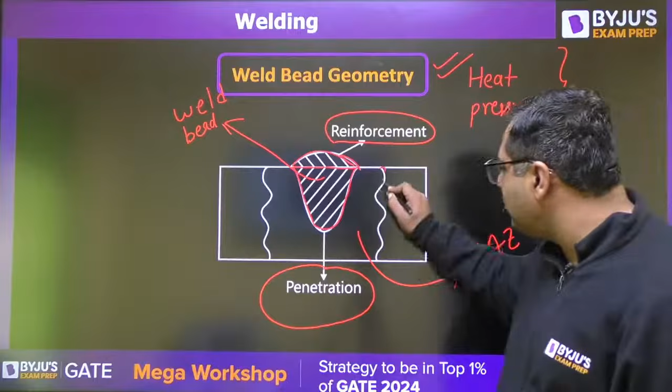After that, the part which is not going to be affected by the heat of welding is said to be the unaffected zone. And if I make a tangent onto the reinforcement part, like this, then this angle is said to be the angle of convexity. It somewhere gives the idea about reinforcement, how much it is.

So guys, this is the weld geometry I have just defined. Very good, Amir. So I would ask you, we have discussed here three portions: heat affected zone, unaffected zone, and weld bead. If I ask you out of these three which is having more strength and which is having the least strength, that kind of discussion I have done many times in the classes on YouTube. So I would like to ask you, out of these three, which do you feel is going to have more strength and which do you feel will have less strength?

Yes, please answer, all of you. Very good guys. So as per your answer, you know weld bead is having the highest strength, and heat affected zone would be having the lowest strength. I would also give you the reason for that. Very good, Deepak Yadav, Shyam Sundar, very good, Naveen, Surendra Singh Solanki, very good.

So guys, out of these three I can say one thing: weld bead is having the highest strength, and heat affected zone is having the lowest strength. And the unaffected zone is going to be intermediate strength. Now you would be interested to know why it is happening.

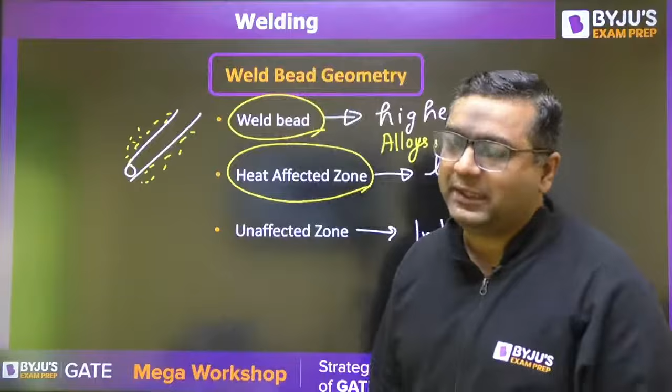But you know, whenever you are taking medicine, it is for the betterment of our body. But if you overdose on it, it is going to affect badly. So my dear, when you take medicine, it is always to be taken as per the prescription.

So when heat treatment is done, we know up to which temperature we have to heat it, up to which temperature we need to hold it, and what should be the cooling rate. If all these things are not controlled, it is said to be uncontrolled heat treatment, and uncontrolled heat treatment is not going to give the better result. It is not actually improving the property.

Because of that, in the heat affected zone, we are not intentionally heating it. Heat is going on because of welding, so whatever temperature is rising is not in our control. We don't know up to which temperature it is going to heat, for how much time, and what would be the cooling rate. So everything is out of our control in that zone, which is why uncontrolled heat treatment happens. And when things are uncontrolled, the properties are going to be on the poor side. That is why the heat affected zone is said to be the weakest part.

Very good, Deepak. So my dear, when we talk about the unaffected zone, there is no effect of heat and no alloy content, so it has intermediate strength. So I will say weld bead has the highest strength, then we have the unaffected zone, and then we have the heat affected zone.

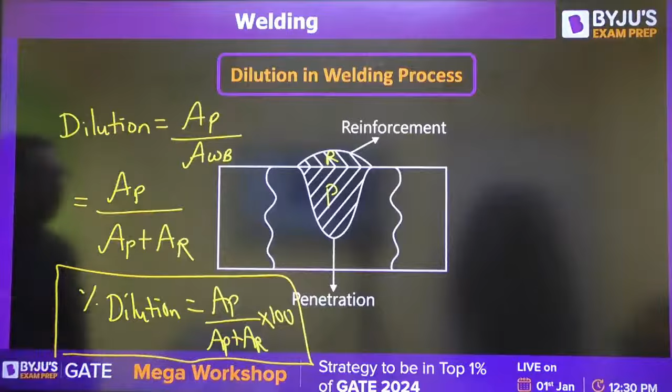And sometimes we are going to define percentage dilution as well. It is defined as AP by AP plus AR into 100. I also want to tell you that from this dilution type of term, you may also get a numerical, a new type of numerical, so be ready for that.

Very good, Umar. Very good, Shubham. Very good, Deepak. So guys, now we are going to start the first type of welding, that is shielded metal arc welding process. So my dear, it is a type of arc welding.

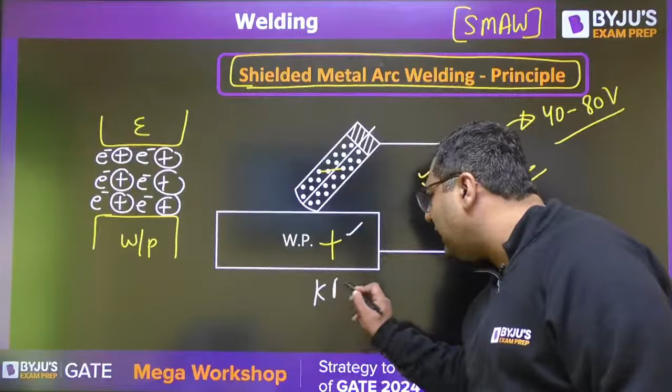So because of that, what is going to happen? The workpiece would be absorbing the kinetic energy of the electrons and the electrode would be absorbing the kinetic energy of the ions. It has been seen that the kinetic energy of electrons divided by the kinetic energy of ions is found to be in the ratio such that this is 2/3 part and this is 1/3 part. So if total 100 joules is there, 67 joules will go to the workpiece and 33 joules would go to the electrode.

You already know the workpiece has thick plates, so it needs more heat if you want to melt it properly. That is why, when you are providing this negative electrode setup—I am not saying the electrode is always negative, this is just for this case—the workpiece would be getting the kinetic energy of electrons, and the electrode would be getting the kinetic energy of ions, and by getting that kinetic energy, it converts into heat.

Because of that, first the electrode wire is going to melt, because this electrode wire has the lowest melting point. When it starts melting, by taking the heat, the flux will also start melting. So the flux has a melting point temperature above that of the electrode wire. The electrode wire and parent metal are of the same material, so the wire is of the same material, but the flux is a different material.

The flux is a different material because it is going to provide the alloy content. Second, it should have a high melting point temperature. Why? Because if the electrode wire is going to melt first, the melting happens in such a way that the electrode wire melts before the flux, and because of that, you get this type of shape, with the advantage that the flame, arc, or spark gets concentrated towards the workpiece. But if by chance the flux melts first, then you will get this other type of diagram.

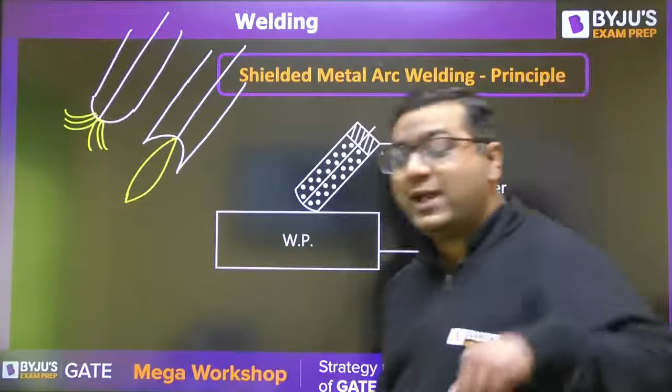So we have discussed two functions of this flux. The first function is providing the alloy content, because of which the weld bead becomes strongest, and that is why welded joints are said to be stronger than the parent metal. The second function is, since it melts last, you get the convergent flame, arc or spark.

So when this happens, the mixture of electrode wire and flux mixes up and goes inside the groove, and you get the weld produced. You will have this weld pool - when it is in liquid form we call it pool, after solidification we call it weld bead. It has the combination of flux as well as the molten wire material.

So now what happens? Flux material has a high melting point temperature, and also has one more property - it is lighter than the pure metal. So as flux is lighter than the pure metal, when you have this molten weld pool, the flux material will go up because it has lighter weight. Because of that, flux will go to the top and try to make a layer upward.

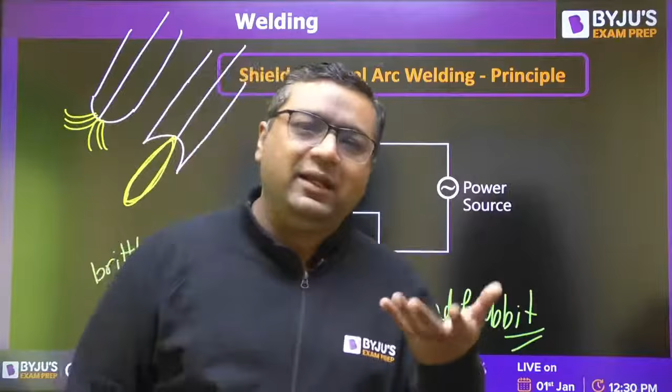When they make metal oxides, these are generally found to be brittle because they are of ceramic nature. So if they are brittle in nature, your entire weld will become brittle. Like, whenever you have a glass - glass is a brittle material - and by mistake when you were holding it, it fell down, it will break into parts.

So likewise, if weld is brittle, it will also break fast. But we don't want that property - we want it to be ductile in nature. That is why we want oxide not to form. So this is the third function of the flux coating: it avoids air oxidation of metal, it gives us alloy content, and it also gives direction to the flame, arc or spark.

So the entire setup is going to be like this. I would also like to tell you, in this zone, this is the zone where arc is produced. There electrons and ions were moving - electrons going towards the workpiece, ions going towards the electrode. During that motion, there was a collision between electrons and ions, and because of that collision, we get a very high temperature of around 6,000 to 12,000 degrees Celsius in the arc gap.

In this arc gap, some ultraviolet rays are also produced, and these rays are harmful for our eyes. That is why it is always advised, whenever you are doing arc welding, to wear some glasses for protection. This is the type of glasses you have seen in the labs also, which were provided so we could do welding safely, because otherwise our eyes may be affected.

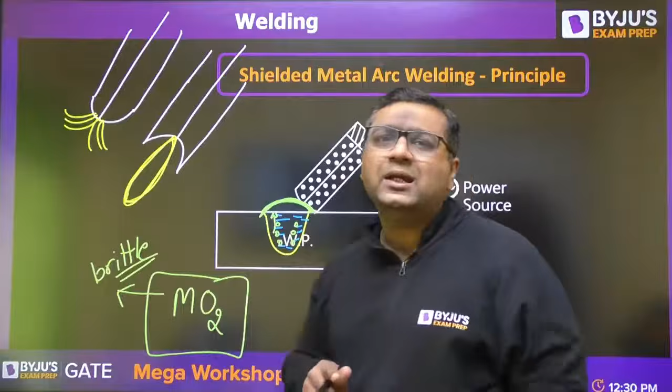Now the point is, sometimes when these flux particles are moving up, that flux particle can make a layer only if it is able to go up within time, because at the same time solidification will also start. So solidification of this molten weld pool shall happen only once the flux particle goes up and makes the layer. Otherwise, the flux particle will remain inside.

If flux particles remain inside, then after solidification we call them slag. Slag is meant to avoid air oxidation. But if that slag solidifies in between the weld pool, it will make a defect. That defect is called slag inclusion.

So why does this defect happen? Because if that flux particle is unable to move up before solidification, which depends on the temperature of the weld pool and depends upon the current settings, if proper current is not provided, then definitely it is going to happen.

You know heat generation is given by I square R T, so heat generation is directly proportional to I square. If current setting is not proper, heat generation will not be proper. In that case you may not have good temperature of the weld pool, because of which slag inclusion kind of defect can appear. So we need to avoid this slag inclusion.

For that we need to work on the current setting. When we talk about the current setting, it would definitely be a part of the transformer. So when we talk about transformers, many types of transformers are available.

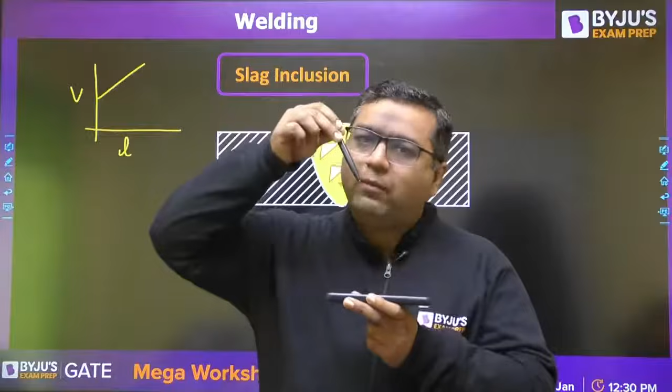So as I said, let us say we have this workpiece and this electrode, and if the gap is more, more voltage is required. If the gap is less, less voltage is required. So we have seen that it is going to be a straight line, V equals A plus BL. This is the equation between voltage and arc length.

So I said, if you are doing this welding manually, you can see this is the workpiece, this is the electrode. As the gap changes, the voltage requirement will change. And if the voltage requirement changes, because of that change, obviously the current setting will also change.

If current setting is going to change, the heat generation will change. Because of that, the temperature will also change. So because of this, the chances of slag inclusion are there.

So what we have seen, there are two types of movement between electrode and workpiece. One is movement of electrode towards the workpiece, other is movement of electrode along the workpiece. When we have two types of movement, this movement of electrode towards the workpiece is very important, because based on that we are going to have the defect like slag inclusion.

So that is why if both the movements are done manually, it is said to be manual metal arc welding process. If we are going to perform the critical movement with machine and non-critical movement manually, we call it semi-automatic type of welding. And if we perform both the motions with the help of machine, it is said to be automatic welding.

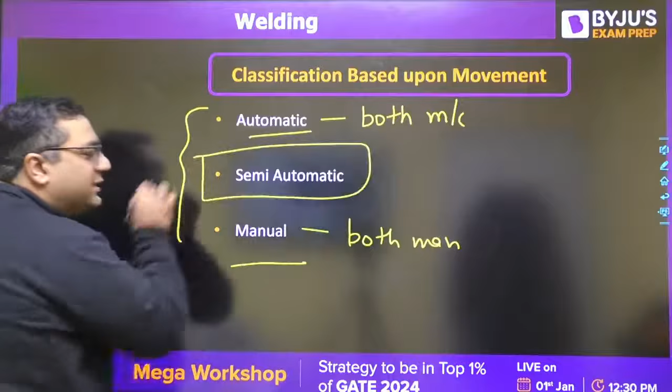If both are going to be done manually, then it is manual metal arc welding, and the best solution is semi-automatic, where critical movement would be done with the machine, non-critical movement will be done manually.

So now if we are going to perform manual metal arc welding process, in case of manual, it is damn sure that arc length will change. Because of arc length, voltage requirement will change, and because of this, current is going to change. So we wanted some temporary solution also for that, because under some situation we may not be able to always go for the automatic types of welding.

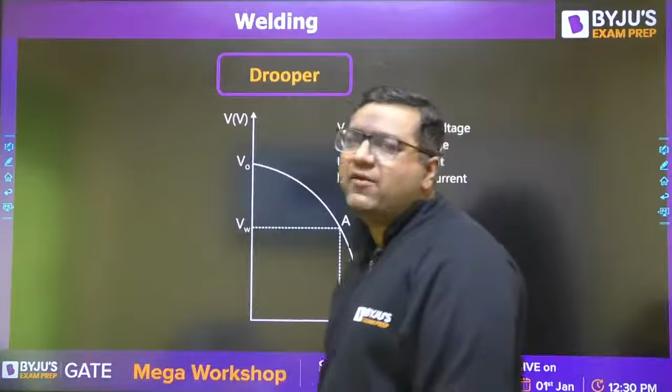So if that kind of thing happens, we can use it with the manual metal arc welding process and the chances of slag inclusion would be reduced. But if we are going to have semi-automatic type of welding, for that case we need not go for Drooper. For that case, we are using this type of voltage arc length characteristic, where previous one is said to be constant current transformer, and similarly this one is said to be constant voltage transformer.

But if I am going to show some linear voltage-current characteristic, there I can make the equation of this type of transformer. Like you have seen, it was linear. So if I plot it like this, then this voltage is said to be open circuit voltage and this current is said to be short circuit current.

So I already told you, if we have a circuit like this, and we are going to have - this is going to be the battery, let us say - we are going to have a battery like this.

We are going to show this. When we have this circuit, it is said to be open because there is nothing in between. So in this circuit, whatever voltage you have across these two terminals is called open circuit voltage, or EMF, electromotive force.

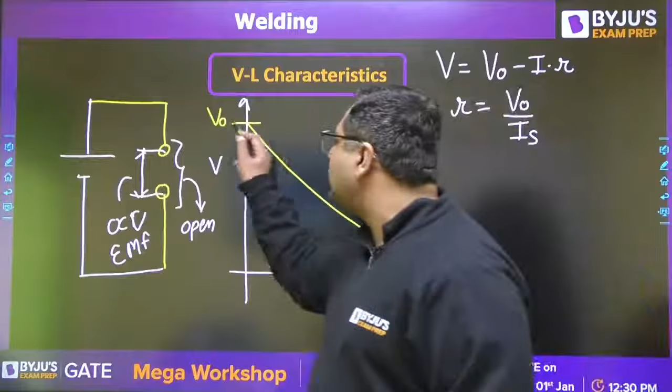But from this straight line, if you want to write the equation, you know we can write x by a plus y by b equals 1. So you can write x as I, so I by Is plus V by V naught equals 1.

Whether you use this or that, you will get a wonderful equation of the transformer, given as V equals V naught minus I times r, which we write as V naught minus V naught by Is into I. So we can also write it as open circuit voltage minus open circuit voltage by short circuit current, into I.

This is the equation of the transformer, and a lot of numericals come from this. As this session is related to the marathon, I am going to take majorly theory here only.

So I have given you this equation, and soon we will have a practice session where we will solve some problems on this. Now, there were some problems with the manual metal arc welding process, because of which we are moving to the second type of arc welding, that is submerged arc welding.

In manual metal arc welding, the first issue occurring was the problem with motion. Yes, if we used a drooper the problem was resolved, but that was still a temporary solution. So to make this motion perfect, we are going to include a machine for that.

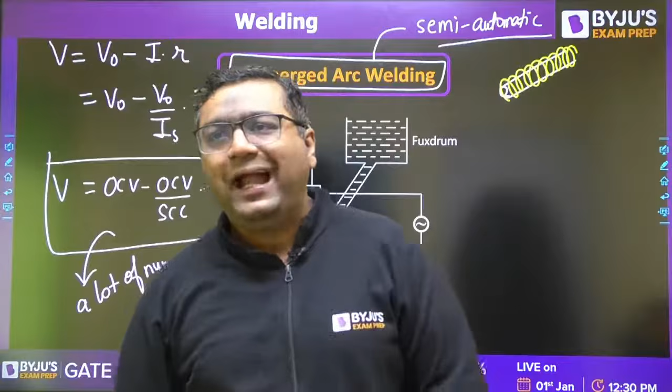So once one electrode wire is going to melt out, you need to change the electrode. And to change the electrode, you need to stop the welding process, which makes it a discontinuous process. So if we want to join two plates, after some time when one electrode is finished, we get a joint, then the next electrode finishes, we get another joint.

In that kind of process, we will have a number of joints present in the welding. If joints are present, there are chances of leakage. So if we are welding an LPG cylinder or a ship, that kind of joint could lead to leakage, and in LPG cylinder or shipbuilding applications we may get accidents. To avoid that, we needed a continuous welding process.

So this process is going to be a continuous welding process. To make it continuous, we have replaced the electrode with electrode wire, which moves continuously because it is present in the wire spool. So continuously the electrode wire keeps coming, and for that continuous input, we are also providing a servo mechanism.

In this servo mechanism, two rollers send the electrode wire at a constant rate. Because of this constant rate, the problem of gap movement is resolved, and you would not have a slag inclusion type of defect.

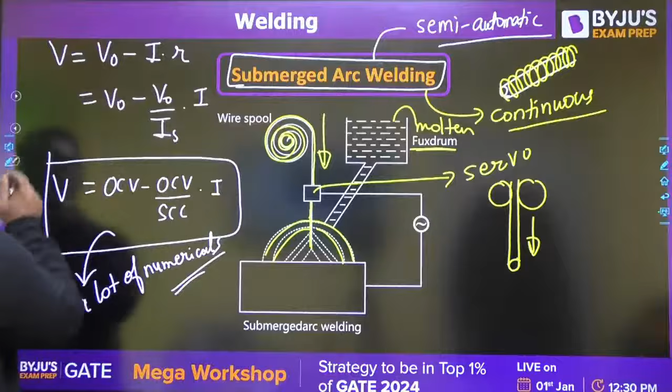It avoids air oxidation because air does not come in contact, and this flame or spark is concentrated because once again the convex type of shape is there. So all the functions are performed in the same way.

This process can be used for two wonderful applications: LPG cylinders, and after that, shipbuilding.

This is a continuous process. It can be used for mass production, and high speed of welding is possible here. Whenever welding is at high speed, the chances of heat affected zone are lesser, so the heat affected zone is smaller for such case.

Yes, please tell me guys. Teju, Amir, Shili, Shreyas, Sri Arvind and other students, please tell me up to this everybody got it or not. So I have revised this.

These are the applications. In short form, submerged arc welding is also said to be SAW.

Ramesh Mon, hi dear, how are you? Sir, shipbuilding, yes Amir, that is correct, I will be telling you.

But if you are not having the option of electro-slag or electro-gas welding, for such case you can tick submerged arc welding also. Otherwise, submerged arc welding is preferred for LPG, and for shipbuilding we are preferring electro-slag. But if electro-slag is not an option, we can go for submerged arc welding.

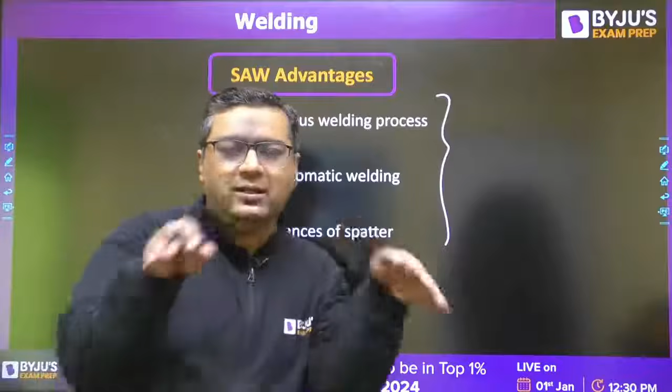The molten flux means chances of spatter are less, because the electrode wire is continuously within the environment of molten flux. So there is no contact of air, and this flame or arc cannot be deviated.

If it would be deviated, it can also create some kind of molten droplets on the metal surface, which is scattering of molten metal. This is not happening here because there is no contact of air with the flame or spark. So there are less chances of spatter.

Spatter is a defect known as scattering of molten metal, which has less tendency here. So the defect of spatter will not be there, and the defect of slag inclusion will also not be there.

Now we are moving to the third type of welding process, that is TIG, MIG arc welding process. TIG is said to be tungsten inert gas arc welding, and MIG is metal inert gas arc welding.

Generally students get confused over this because the name is tungsten inert gas, they are not using the word arc. They feel it is tungsten inert gas welding, so it is not a gas welding technique, it is an arc welding technique. So the name is TIG arc welding or MIG arc welding.

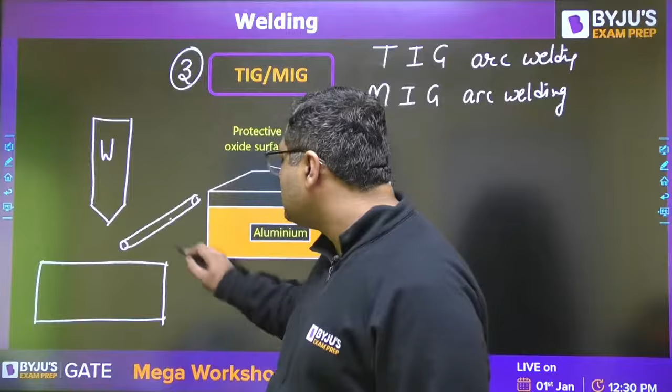So for that purpose, we are going to use some filler rod in this type of process. That filler rod is made up of the same material as that of the parent metal, so they have the same material. We will be using this consumable rod separately.

So what is the purpose of using such a thing? Why are we using tungsten? Tungsten is a very hard and brittle material. That is why if by chance its droplet comes inside the weld pool, it will make the entire weld brittle. So we never want that kind of thing. The first thing is very clear from here.

Second thing is, when we are using this tungsten, what is the reason behind that? Till now we were using the polarity where the workpiece was going to be positive and electrode was going to be negative. This type of polarity is said to be the straight polarity.

But when we are going to have aluminium type of material, it is very difficult to weld. So the weldability for aluminium is very poor. Why is it so? You already know metals cannot control themselves when they see oxygen in the heated state. But aluminium is so reactive that even at room temperature it reacts with oxygen and makes a layer of aluminium oxide, Al2O3. This Al2O3 is a kind of ceramic material which is very hard and brittle. We cannot weld it, so for welding of aluminium, we need to remove this layer.

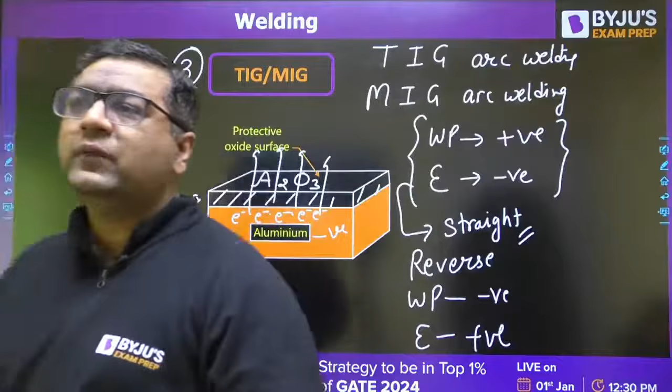Do we get alloy composition in the weld? If you want alloy composition, you would be providing separate powder for that purpose. But actually TIG welding is generally done for aluminium on very thin plates of 5 to 8 mm, so for that we need not do all this kind of thing.

So when these electrons go out and peel off this layer, that process is said to be cathodic cleaning, as Manas has written. You might be asking, sir, what is cathodic cleaning? Cathodic cleaning means we make the workpiece cathode, meaning negative, and then we clean it. That cleaning is happening because of this cathode, so that is why the name is cathodic cleaning.

But now the problem is you are making the electrode positive, so the melting temperature of the electrode should be very high. We use tungsten or tungsten carbide, because their melting point temperature is more than 3500 for such cases. No doubt, if by chance even a single droplet of tungsten goes into the pool, the weld will be very poor, so we need to avoid that. So we never make this type of electrode.

In reality, when we make the tungsten electrode, we make it of this shape. Meaning if the diameter of this tungsten electrode is D, we keep the diameter of the surface to be 1.2 to 1.5 times, meaning 20 to 50% more diameter we are going to keep. When we do this, the heat required to melt the tungsten electrode would be more, so the chances of melting get reduced. This thing is said to be electrode preparation.

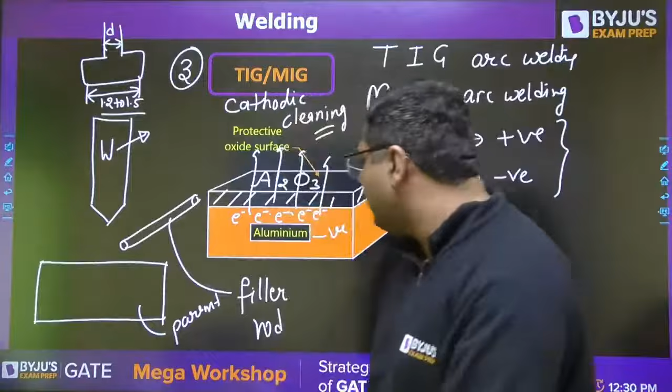Whenever you are doing welding here, we can weld very thin plates of aluminium because the workpiece gets less heat, since the negative terminal gets 1/3 part of the heat and the positive terminal gets 2/3 part of the heat. So that is a kind of limitation for this process also. When we use this TIG process, we get to know about the term weldability. If we talk about the weldability of steel, I would like to say that weldability is inversely proportional to the carbon content. If carbon content is more, weldability will be poor.

So that is why whenever we are going to have low carbon steel, medium carbon steel and high carbon steel, weldability is going to be poor for high carbon steel, and highest for low carbon steel. Weldability is inversely proportional to the percentage of carbon content.

Now the point is, here you are not using the flux. Who will solve the purpose of flux? We are not providing molten flux here. We are providing inert gas, and this inert gas will solve the purpose of flux.

When inert gas is provided, it also helps us make a concentrated flame, because we provide the inert gas from all sides. It will also avoid contact with air, and since inert gas is non-reactive, there would be no reaction between the surface and the inert gas. That is one more advantage.

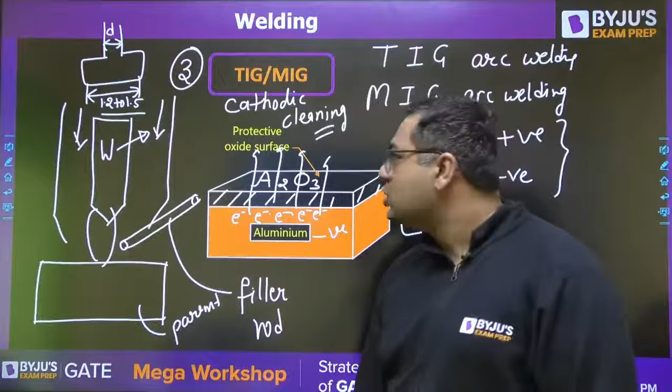So as inert gases, you can use helium, neon, or argon. Generally we use argon from an availability point of view.

So we have studied the TIG process. Here there are some problems. One is you are using a tungsten electrode which is non-consumable, but there are still chances of consumption if temperature increases beyond a range.

Second problem is, since we are using this non-consumable electrode, a filler rod is required, and the filler rod has a constant size. Once the filler rod is used up you need to stop the welding. Also, because of reverse polarity, you cannot weld thick plates.

So for that purpose, an improvement came in the form of the MIG process. In the MIG process we have replaced the tungsten electrode with a metal electrode which is consumable, so a filler rod is not required. Here we were once again providing the servo mechanism.

So there will be a continuous flow of electrode. Once again you are using inert gas for the purpose of flux. That is why the name is Metal Inert Gas arc welding.

Now, this is inert gas in general, and inert gas is going to be very costly. If you replace this inert gas with CO2, which can be done with metal inert gas welding, then since CO2 is not an inert gas, the name of the process becomes Metal Active Gas Arc Welding process.

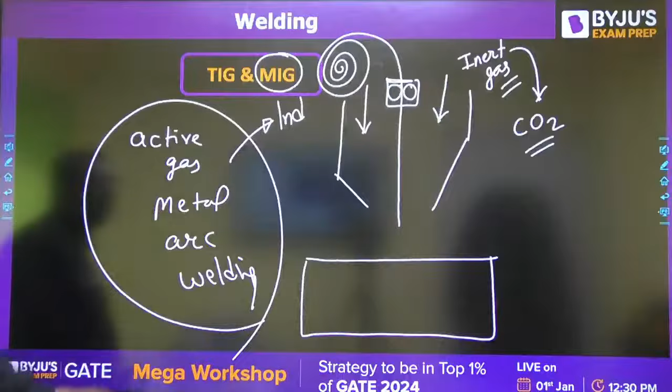This is the process nowadays used in industries. It is similar to submerged arc welding. So this process is active gas metal arc welding, and it is used in industry. It has replaced the TIG process. I feel everybody is getting this. This is said to be the MIG process.

Now I am going to tell you something more about numericals. There are three types of heat. One is heat generated, which is given as I squared RT. Second is heat supplied. Third one is heat required.

Let us say we need some 700 joules of heat for welding or melting purpose. For that, we may be providing some 1400 joules. Why are we providing more? Because during welding, the entire setup is exposed to atmosphere, so there would be some losses of heat to the atmosphere. So if requirement is 700, you are supplying 1400. This gap of 700 is the heat loss to the surroundings.

Whenever we are going to have this heat supply, we need to generate the heat. Heat generation takes place by this formula, and let us say we are going to generate 2000 joules of heat. Why is heat generation more than supply? Because heat is generated at the tip of the electrode, then that heat is distributed, and some heat loss to surroundings happens there too. So there would be a heat loss of 2000 minus 1400, which is 600 joules, and that is heat loss 1. This other one is heat loss 2. So this total is the heat loss to the surroundings. Heat generation is 2000, requirement was 700.

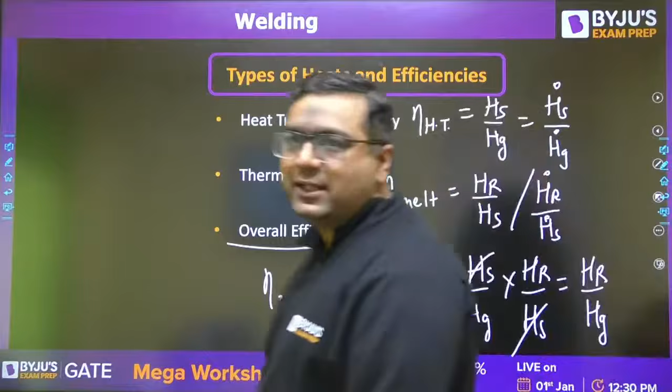Guys, you may be thinking I am going very fast, but as I already said, this is the revision marathon. So when you are reading your notes, it should feel like in the movies, when letters were exchanged, and you could hear the actor speaking from the letter. This marathon is of that type only, like your notes are speaking.

Their process is welding. So generally process efficiency will be said to be this melting efficiency only. But in general they mention it using the terminology we have discussed here. I feel you got it.

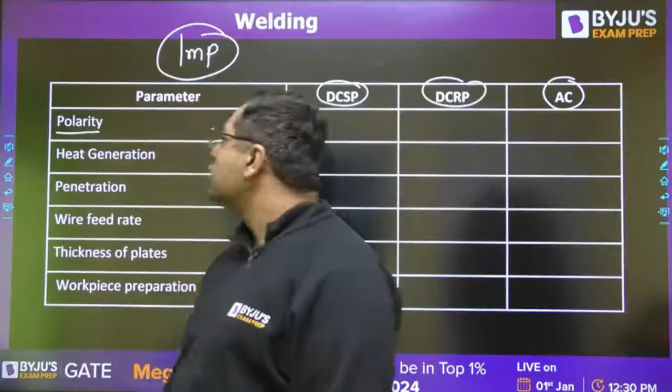Now we are talking about polarity. In direct current straight polarity, workpiece is positive, electrode is negative. In direct current reverse polarity, workpiece is negative, electrode is positive. In alternating current, workpiece is positive and negative alternately, electrode is negative and positive alternately. For heat generation: in straight polarity, workpiece gets 67%, electrode gets 33%. In reverse polarity, workpiece gets 33%, electrode gets 67%. In AC, both workpiece and electrode get 50-50%.

Then penetration: here workpiece is getting more heat, so we get deep penetration. Here we get shallow penetration. Here we get intermediate penetration. Wire feed rate means the rate at which the electrode wire is melting. That would be less here because less heat on electrode, more here because more heat on electrode, and intermediate here because it's 50-50 heat.

Thickness of plate you can weld: in straight polarity you can weld thick plates because workpiece gets more heat. Here, thin plates, because workpiece gets less heat. Here, intermediate, because both get 50-50.

Now workpiece preparation. We have already seen electrode preparation. If my workpiece size is less than 5mm, we directly weld them. For more than 5mm, we provide some kind of preparation for more molten metal to come inside. This is called workpiece preparation, done when plates are of more thickness. So workpiece preparation is done in DCSP, not done in DCRP. In AC, it depends on thickness - generally if thickness is more than 6 to 8mm, only then we go for this workpiece preparation. Different books show different values for that.

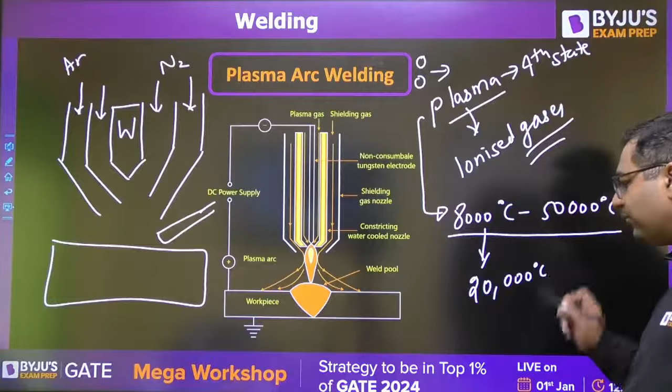You may be thinking, sir, at that temperature the plates will get melted out. So I am not saying that temperature will be there with the plates. That temperature would be there with the gases. Whenever these plasma gases react with the arc, because you provide some power supply here, these plasma gases convert into ionized gases, which get a very, very high temperature.

Like whenever you are sitting in front of fire, that fire definitely has some very high temperature. But when the air taking the heat from that fire comes to us, that heat will not create that same temperature for our body. Why? Because our area is more, so when that heat gets distributed, our temperature will not reach that much.

That is going to happen when those plasma gases come to this workpiece. Deep penetration will be there, and that is why when this kind of welding takes place, we call it the keyhole phenomena. Why keyhole phenomena? Because when this plasma gives energy to the plate, it is going to cool off. So because of that, you get the keyhole type of weld bead, where the plasma attacks, gives energy, and reaches deep but with very less thickness.

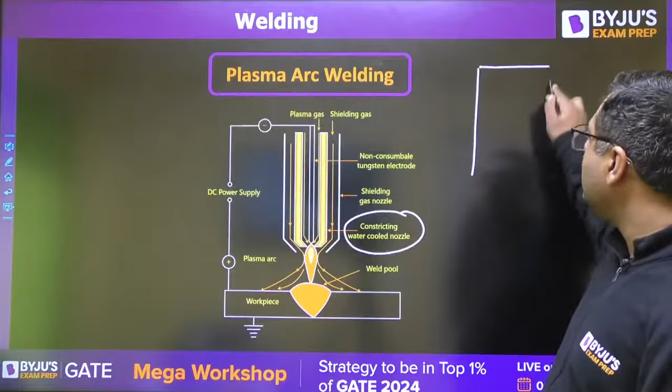Here we need to cool the electrode also, otherwise the electrode may reach that high temperature and melt. So for that purpose, sometimes we provide artificial cooling. Water cooled nozzles are provided all around the tungsten electrode to keep it cool for that welding process. So that is said to be the plasma arc welding process.

Now the last type of arc welding process is electro gas or electro slag welding. In this, I am showing you with a simple diagram. You have this as workpiece 1, this as workpiece 2. You can consider them to be the two plates of a ship, and you want to join these two plates edgewise. So when you want to join them along the edges, you need to pass your electrode wire from here, so that this electrode wire can provide molten metal here.

For that, to start the welding, we need some starting point, otherwise molten metal will spill away. So for this type of welding process, we need to provide a starting plate for the welding. This is the starting plate. So initially, the arc is going to be produced between the electrode wire and this starting plate.

We would be providing the power supply like this. Once welding starts, this electrode wire after melting will move upward and the weld will move ahead in the upward direction. If molten metal is not solidified soon, it will spill away sideways. You have provided a starting plate, but from the sideways it can still spill away. So for that purpose, we are going to provide some copper shoes.

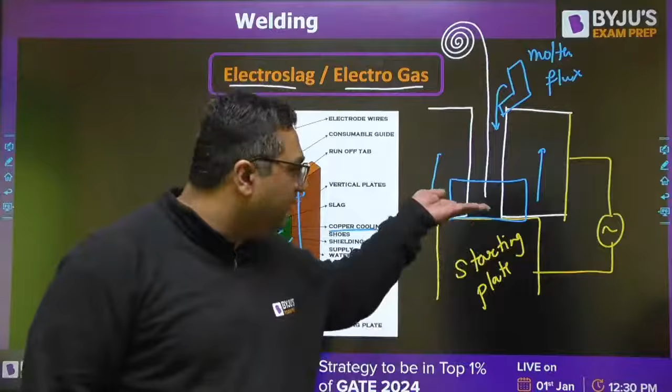Here the loss of heat from the sideways or all around is not that much, so sometimes the heat becomes very, very high. For such cases, we can switch off the arc for some time. Because of that very high temperature, welding will continue without any arc or spark. So you can switch off the current and welding will still take place. When you switch this off for some time, the temperature will go down, and once the temperature goes down beyond a value, you will once again switch on the arc.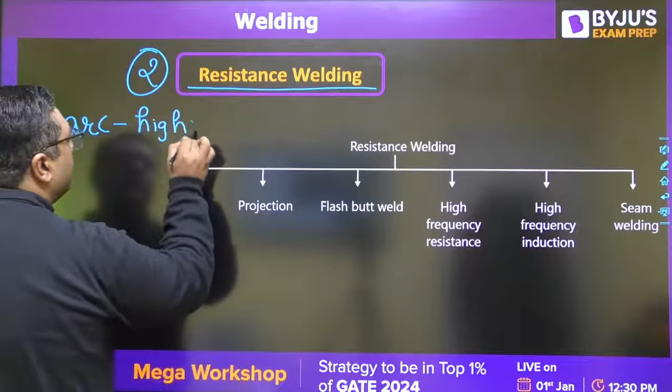Moving to the second welding process, that is resistance welding. In arc welding, voltage was playing a very important role. If we are talking about the arc welding process, it is said to be a high voltage and low current welding process. But when we are talking about resistance welding, it is a low voltage and high current welding process.

When we say this, many students get confused because they see in the question that voltage is given in the range of 40 to 80 volts, and current is generally seen from 400 amperes to 1000, 1200, 1300 amperes. So they say, sir, current is more than voltage.

Comparison can never be done like voltage with current. Comparison is done voltage with voltage, current with current. Here voltage may be up to 12 volt, so 12 volt and 40 to 80 volt, this is more. And here the current, if you are talking about, it is more than 10,000 amperes. So just compare this current and voltage separately. Here current is more, here voltage is more. So in resistance welding, current is more than 10,000 ampere. In general, even sometimes you will see values of 1 lakh amperes, 50,000 amperes, 35,000 ampere.

As the current is very, very high, all of you are aware that heat generation is written as I square RT. So as current squared is there, if current is very high, you need to reduce this time because you cannot have that high current for more time, otherwise the entire plates will melt out.

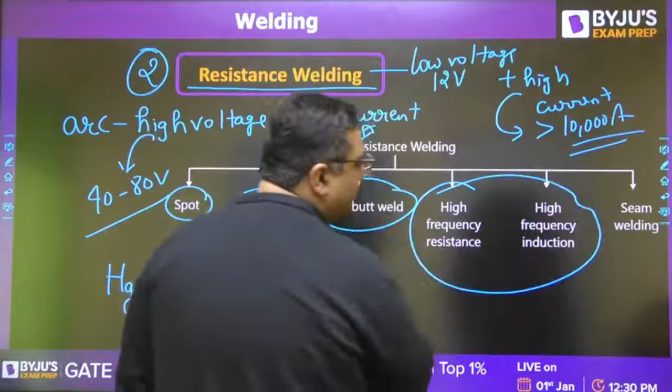The types of resistance welding are spot welding, projection welding, flash butt welding, high frequency resistance and induction welding, and seam welding. All these are types of resistance welding. After this welding process, other welding processes will not take that much time. As I said, we are going to complete in 2.5 hours. So this is the first type of resistance welding process, spot welding.

So what is going to happen? This is workpiece 1, workpiece 2. This time you are going to keep 2 workpieces like this, and there is a lower die which is fixed, and an upper die which is movable. This upper die, I shall not call it die, it is actually the copper electrode. So these copper electrodes, generally this one is said to be fixed and this one is said to be the moving one in general.

When we are going to apply force, some penetration will happen from both the sides because pressure is applied from both sides. So this much penetration will happen, the electrode will get penetrated into the sheet. Now this phase is said to be the penetration phase, and in this phase, if I show you two diagrams, one for the pressure, other for the current. This first time is said to be the squeeze time. For that time we are going to increase the pressure and there is no current flowing for that phase.

Now what will happen after that? After the squeezing time is over, we are going to supply some current. That very high current is going to pass like this. So when this current is passing, obviously every surface will show some resistance. There is resistance of this copper electrode, R1, R1. Then there is resistance of this surface, the interface between copper electrode and workpiece 1. This resistance I will call R4, R4. So here also R4 will be there.

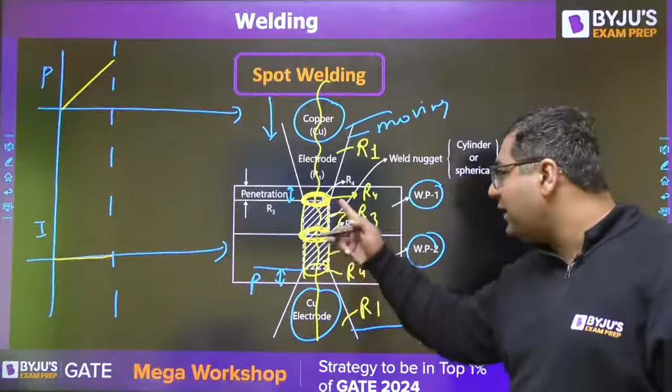Then there is some resistance provided by this mild steel plate, shown as R3, R3. And there is a resistance between the interface of the two plates, denoted by R2. So you can see R2 occurs once, R3 twice, R4 twice, R1 twice. If you see, this R2 is quite more than all other resistances, which added together, R1 plus R3 plus R4, the summation is even lesser than this R2.

So R2 resistance is very high, and because of that high resistance, when the current passes, here we will be having more generation of heat. Because of that more resistance, more heat, the weld is getting produced here. And when the melting starts from the center, this weld bead, this fusion zone, will start expanding. This may expand in the shape of a sphere, a cylinder, or any other geometry. Here we have shown it like a cylinder, but it can be cylinder, ellipse, or other shape.

In general, we assume the fusion zone to be either a cylinder or a sphere, as per our assumption, for easy calculation. Otherwise, it can take any shape, and this fusion zone will be reaching up to the electrode and we will get this weld to be done. This is how the welding will be performed.

So this is the second time, like already mentioned in the comments, this pressure remains same, and for this time we are going to provide some current. This time is said to be weld time. Now because of this melting, melt is going to take place between the plates, but this time we will not call it weld bead. We will call it weld nugget after solidification.

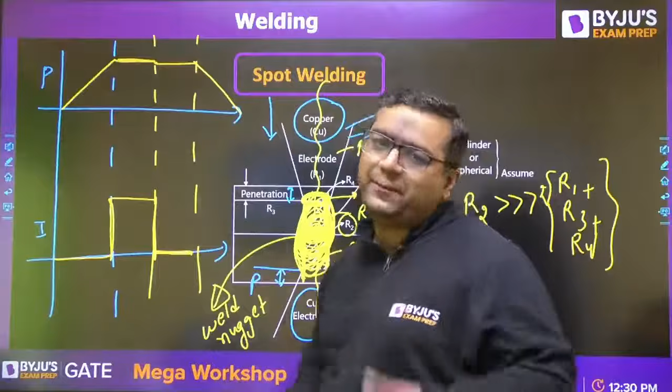You would be getting these two plates joined with the joint, and as the joint is like a spot, we will call this process spot welding. This is how the process is going to be over.

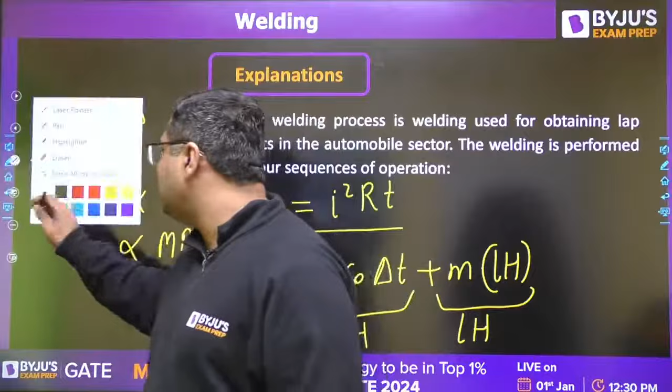This thickness is also directly proportional to the melting point of the plate. Sorry, let me correct it, don't worry. I would like to say that this I square is also directly proportional to this melting point. If melting point is going to be more, then also the current requirement will be more.

Why am I telling you these things? Sometimes questions come that for this much thickness, this much current is required, so for that much thickness, how much current would be required? So if they say for TH1 we need I1, for TH2 what would be the current requirement?

You can say that thickness is directly proportional to current square. So TH1 by TH2 can be written as I1 square by I2 square. Similarly, if thickness is not given but melting points are given, then you can write melting point 1 by melting point 2 equals I1 square by I2 square. Using these relations, you can find out the unknown if any unknown is there.

From these formulas, till now there is no question asked, so because of that, in the practice session, I will take these type of questions.

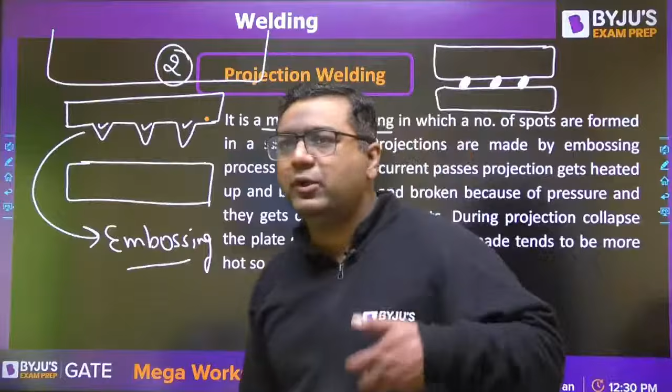Once again we would be having the copper electrode on both sides. This time, when you do the squeezing, at these projections you have made, those projections are going to be broken, because you are applying pressure, so some plastic deformation will happen, and these projections would be broken.

Wherever the projections are there, the sheet having the projection will have more heat because of this plastic deformation. So generally projections are provided on the sheet which has either good conductivity or more thickness, so that it can bear that heat and transfer it to the surrounding.

In general, spot welding is used in the automobile sector. When you make so many spots together, the chances of leakages will be there too, because it is not a continuous type of welding.

When we have these projections, these are the hot spots, because whenever you provide them, plastic deformation happens there. If you compare these two plates, if they have different thicknesses, this one would have more thickness and this less thickness. If they have the same thickness but different conductivity, this sheet will have more conductivity and this less conductivity. These are the points you need to take care of in this type of welding process.

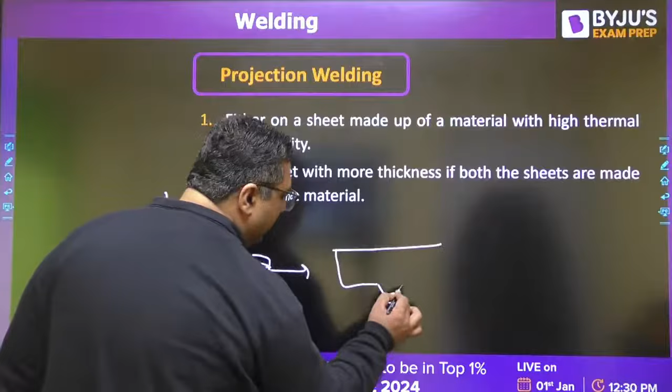When you make these projections in the sheet, you put this sheet at some place where you use this type of die. When you have a die of this type and apply pressure, this sheet converts into the sheet where projections are there. So these projections are made by this kind of process, and this process is called embossing.

We will have more clarity on embossing and coining when we see the metal forming chapter, tomorrow or day after tomorrow.

Now we are moving to the third type of resistance welding process, which is flash butt welding. As we have already seen, this welding process came for the lap joint configuration. Some people think we cannot use it for the butt joint configuration, but that is not so - we can also make the butt joint from this type of welding.

For that, what we are going to do is place two rods which are going to be joined together. This process is generally used for joining railway tracks in developed countries like America.

In developing countries, we use thermite welding, but for flash butt welding, you keep two railway tracks together and bring them towards each other. When they connect, you provide pressure, and at that time, you also provide some current, generally in the range of 1 lakh ampere.

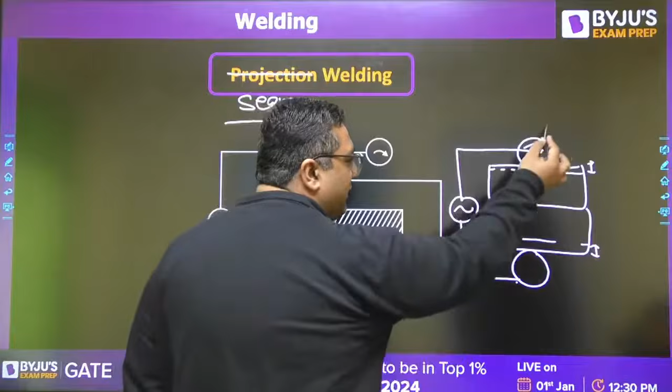Current is also passing, and at the joint of the sheet, at the interface, we have the highest resistance. Because of the highest heat there, the weld takes place. This is a continuous welding process, whereas spot welding and projection welding were discontinuous welding processes.

Sometimes in numericals they use D equals 6 root T, and other times D equals T. It depends on the thickness of the sheet. When thickness is less than 8 mm, we use D equals 6 root T. This comes from the data book, and in GATE questions you won't get that kind of thing because it requires the data book.

In this process, as current flows continuously, by the time the roller reaches a new position, that part is already welded. Sometimes some part of the current also passes through the already welded portion, causing a loss of current, which is called shunting of current.

This is a continuous welding process, used to make jalis like the ones you see in the kitchen, where the structures are connected continuously. Since it is continuous, the speed of welding is more here, and as I said, shunting of current is the loss.

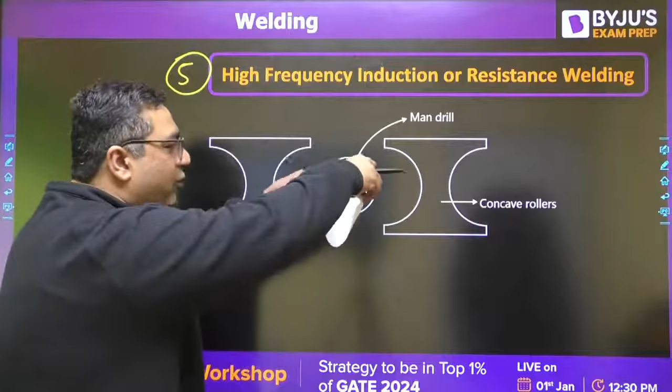Concave rollers apply pressure onto the strip and give it the exact shape of the pipe. Once the shape is provided like this, you need to join it to get a complete pipe.

So my dear, seam pipes are made by this process, and seamless pipes are made by true centrifugal casting. If you are going to join this, you would be having a sheet like this. Here you provide some positive, here you provide some negative. Then when this gets joined together, because of the current produced, the weld is going to happen.

My dear, generally these pipes have a length of 20 feet which are available in the market. Jindal Industry makes that kind of pipes, and many others are also there. So when you get these types of pipes, they generally have a length of 20 feet.

So my dear, now if you provide conductors and use direct current, we call it resistance welding. If you provide inductor coils and use AC, we call it induction welding. Generally, we provide high frequency alternating current.

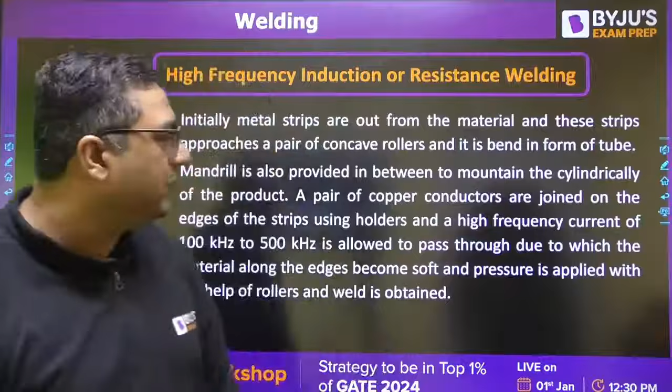Sir, is there any term repercussion welding? Dear, I feel you have written the name not correctly. Percussion welding is there. That percussion welding is not actually a type, it depends on the process. If the finishing happens better, then we call it that. If you want, I will share it with you. Percussion welding is the name which is used.

So my dear, here we are using the copper conductor. Here and here, copper conductors are there. This is the mandrel which is used to make the cylindricity of the pipe. Current used is 100 kilohertz to 500 kilohertz, this is the frequency of the current we are using.

Seamless pipes are made using centrifugal casting, we have already seen that. So here my dear, we are making it and we have completed the resistance welding process. Now we are moving to the solid state welding process.

In solid state welding process, the first process is explosive welding. As I said, in solid state welding, melting will not happen. So my dear, we would be having a workpiece which would be treated as a target plate, and we would be having a flyer plate which is always thinner than the target plate, and this is what we want to weld over it. Always the flyer plate is thin. Then my dear, here we are going to use explosion.

So we need to use some explosive material. We could provide this explosive onto this thin plate known as flyer plate, but when explosion happens, there are chances that the surface will get blackened. So to avoid the blackening of the surface of the flyer plate, we are providing a buffer plate in between. This buffer plate is generally made up of rubber, as you know rubber has excellent damping capacity. So my dear, generally this buffer plate is provided in between.

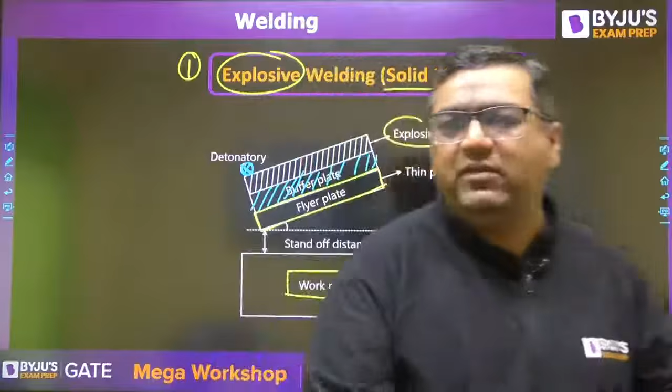You must have seen in movies where these kind of scenes are shown, where some blasts are shown. Like there was a movie where Akshay Kumar was also there, I do not remember the name, it was Special 26 or whatever it was. So in that movie, when the blast happens, the actor or whoever is near that blast is shown like they are just moving in the air.

So they got some pressure wave, because of that they got a very high shock, and because of that they go to a very far distance. Similarly, my dear, that pressure wave will be given to this flyer plate. Because of that, this flyer plate becomes semi-solid and goes to connect onto this workpiece. You are providing this angle which will decide the direction of welding. You are providing this initial distance known as standoff distance, which is provided for initial impact.

Numericals are coming from this.

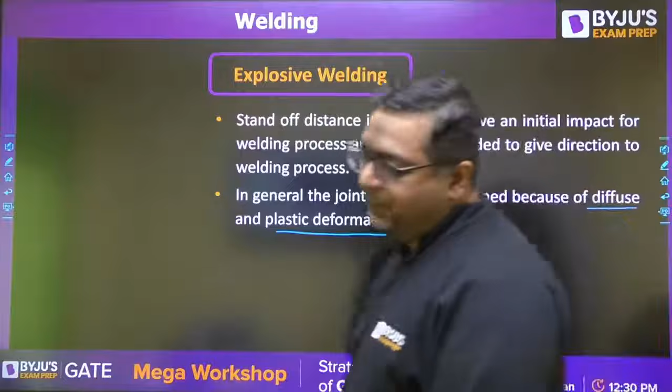When we are talking about this type of process, generally diffusion is going to happen, so one material gets diffused into the other. Whenever we talk about diffusion, it is like if we have two gases in a container, A gas here, B gas there. If you remove the partition, both gases will get diffused into each other. That kind of thing is said to be diffusion, which happens in this type of welding.

The second type of solid state welding is friction welding. If you see its application, this is used whenever you go for cladding of cylinders. For cladding process, explosive welding is used. Friction welding is used whenever we are going to join the drill bit.

With the shank. This has already been asked in the GATE exam: what is the application of friction welding? So when the drill bit is connected with the shank, that process is called the friction welding process.

Here also we have two things: one is rod A, other is rod B. Rod A is rotating with some speed omega, and rod B is stationary. You take rod B towards A. So A has motion, B is stationary. When both of them are connected, initially A is rotating, B is at rest.

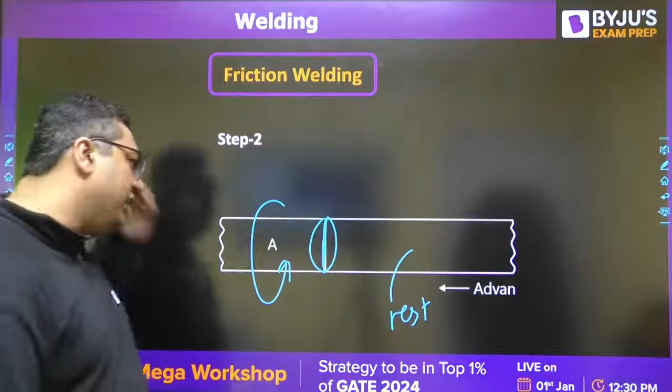Because of that, at the interface there will be some relative motion. Relative motion means generation of friction. Because of that, friction tries to make both bodies have the same motion. Friction will try to stop A and try to rotate B. Since you are continuously giving speed to A, friction will not be able to convince the first body, but it will be able to convince the second body, and after some time both will be rotating with the same speed.

During the time friction is there, a lot of heat is produced between the surfaces, and because of that heat, diffusion welding takes place, but melting does not happen here. So it is a kind of solid state welding process, used for joining drill bit and shank.

If both materials are the same, you will get this type of weld bead. But if the material is different, the hard material will not show any kind of deformation, while the soft material will make a layer over it like this. In the case of drill bit and shank, the shank is soft material and the drill bit is hard material, so we get this type of weld bead geometry.

Moving to the next process, the third solid state welding process is ultrasonic welding. As the name suggests, we use ultrasonic energy of vibration. Here we have workpiece 1 and workpiece 2 placed together, and we have an HSS tool tip with some clamping arrangement that provides a sonotrode which transfers vibration to the tool tip.

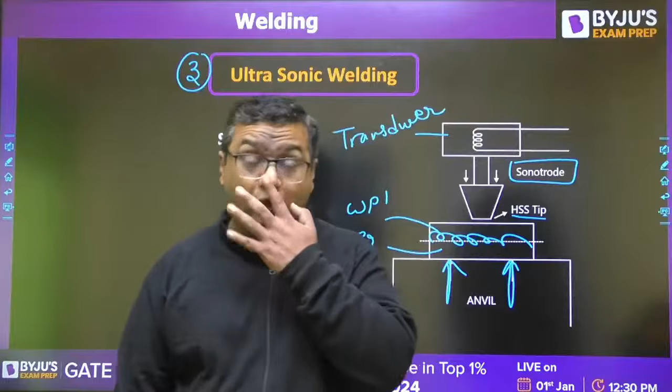As you are not using a lot of energy here, this kind of welding can join very small or thin elements, and it is used in the electronics industry. If you want to join ICs, diodes, transistors, those kinds of elements.

So in the electronic industry, this process is used where we need to weld very small electronic components like ICs, transistors, or diodes. That is the application of ultrasonic welding. The others we have already seen.

Now we are reaching the gas welding process. Gas welding is a kind of chemical reaction type of welding, and it has a generalized name, which is important from a theory point of view. The generalized name of this welding is oxy-fuel welding. Here oxy indicates we have an oxygen cylinder, fuel indicates we have some fuel cylinder. That fuel can be acetylene, hydrogen, methane, or propane. Whatever fuel we use, the name changes based on that.

If you are using hydrogen, it is oxy-hydrogen welding. If the fuel is methane, it's oxy-methane welding. But in general, what we study is acetylene, so we call it oxy-acetylene welding. When we talk about oxy-acetylene welding, C2H2 is acetylene.

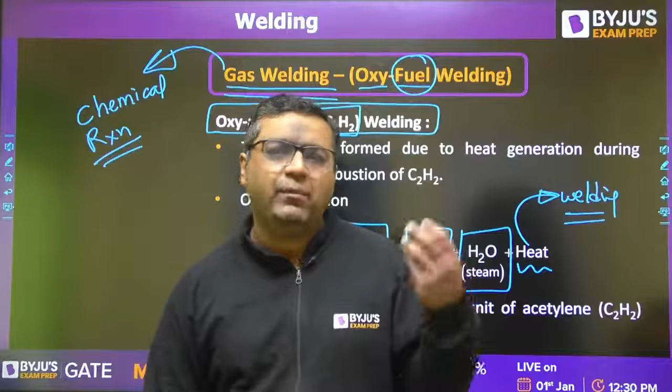You are aware that when C2H2 reacts with oxygen, you get 2CO2 plus H2O plus heat. You must be thinking, sir, how does this reaction happen? 1 mole of acetylene requires 2.5 moles of oxygen. If you provide 2.5 moles of oxygen, you will not get any flame, arc, or spark, because it would be a complete combustion, which happens in the IC engine.

But we also require some kind of flame or spark for the welding process. So for that purpose, this reaction happens in two stages. In the first stage, C2H2 reacts with oxygen and converts into carbon monoxide, 2CO, plus H2, plus heat. Then, this 2CO plus H2, when reacting with 3/2 O2, gives you CO2 plus H2O plus heat. So you are getting heat two times in this two-stage reaction.

So these are the two kinds of heat we have seen, heat 1 and heat 2. These two reactions are denoted by two flames. The first reaction requires 1 mole of oxygen, the second reaction requires 1.5 moles.

We never provide the full 2.5 moles of oxygen; we always provide a lesser amount. Why? Because when you are not given proper food at home, you will search for food from outside. Similarly, we have a torch in which acetylene and oxygen are provided from the cylinders. If oxygen is provided in insufficient amount, then to take the extra oxygen needed for combustion, fuel comes outside in the form of flame.

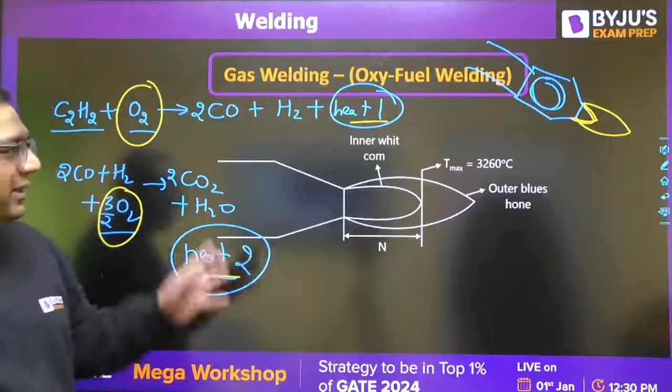The inner flame has lesser surface area, the outer has more surface area. Comparing this heat and that heat, the amount of heat can be more for different fuels, but the temperature of the inner one is always more because of lesser surface area. When heat gets distributed over a flame, its temperature decreases, so the smaller flame always has more temperature. Due to this, the inner flame is always used for the welding purpose, and the outer flame is used for preheating and post-heating work. So you can see here we have an inner white cone and an outer bluish cone.

So two types of cones are there. This inner cone is traveling some distance N, and this outer cone will always be traveling more distance. So now we are talking about the first type of flame.

There are actually three types of flames: one is said to be neutral flame, other is said to be oxidizing flame, and the third one is said to be the carburizing flame. So when we have these three types of flame, how do we decide which one it is?

You know, 1 mole of acetylene requires 2.5 moles of oxygen. So we are never providing that much.

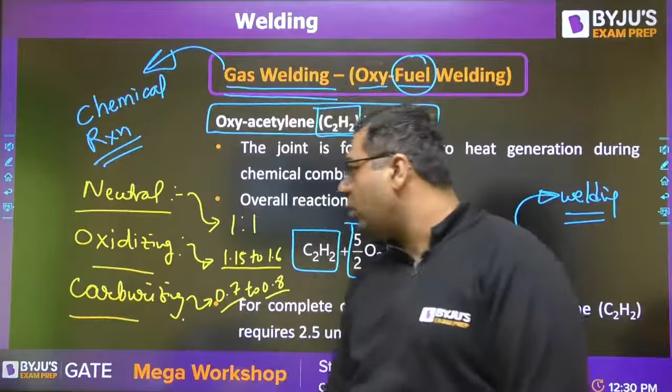So in all the flames, we are providing oxygen lesser than the fuel. For the neutral flame, we provide C2H2 and O2 in the ratio of 1:1. For that, N is the distance traveled by this flame.

The temperature we get here is 3260 degrees Celsius for the inner flame. Then we also have the second type of flame.

This is the oxidizing flame, where you are providing oxygen amount slightly more than that of the acetylene. Here the temperature is 3380 degrees Celsius. As you are providing more oxygen from the cylinder, this time the distance traveled by the flame is lesser - around 0.33 to 0.5 times of N.

If in the neutral flame it was traveling distance N, here it is traveling 0.33 to 0.5 times of N. This time the temperature would be more, because the flame surface is going to be less, so that is why the temperature would be more.

Generally oxidizing flames are used for alloys like brass, bronze and so on, and neutral flame is used for normal ferrous materials. There is one more exception when we are talking about brass.

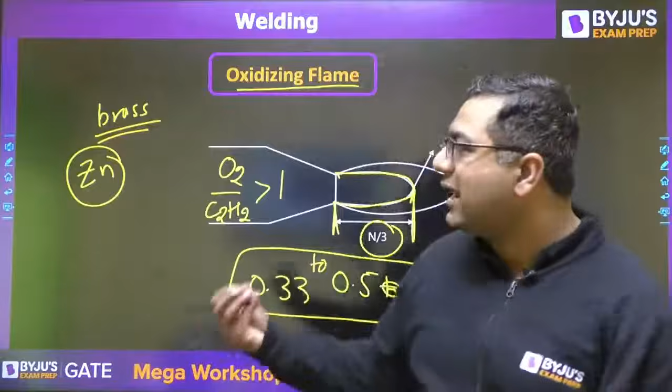Here some zinc is present. So whenever we weld brass with the neutral flame, zinc has a very low vaporization temperature, so it gets vaporized. If you don't want it to vaporize, we weld it with oxidizing flame, because here more oxygen is present. So zinc will react with oxygen and form ZnO.

The vaporization temperature of ZnO is much more than that of zinc. Because of that, ZnO forms a layer over the weld pool, so zinc will not vaporize, and in that case you can save the zinc inside. So brass is generally welded using the oxidizing flame.

When we talk about sounds, in the neutral flame we get a hissing sound, like you may have heard in a movie. Similarly, oxidizing flame gives a roaring sound. But carburizing flame is a silent flame - no sound comes from it.

In carburizing flame, you provide that much less oxygen that the fuel itself comes outside to get oxygen. Because of that, some acetylene feathers form, traveling a distance 2 times that of the neutral flame, because of which the temperature reduces to 3060 degrees Celsius.

Carburizing flame is generally used for welding cast iron or high carbon steel, where carbon amounts are more. Otherwise, if you weld low carbon steel using this flame, it may absorb carbon from the acetylene feather. So we use this flame on elements already saturated with carbon - carburizing flame is used for cast iron, high carbon steel, and similar elements.

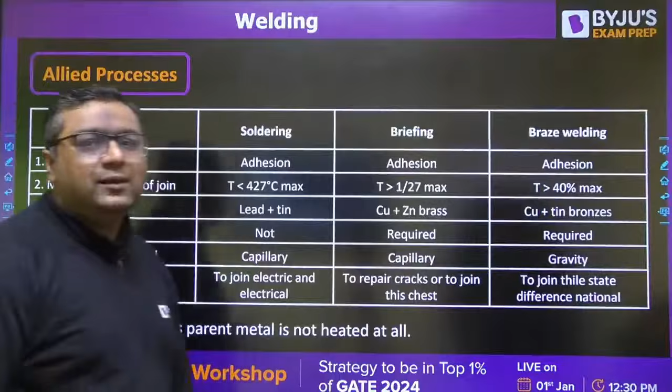We have already completed gas welding. Now we are reaching the allied processes. Some other welding processes are pending, like electron beam welding, which will come later. This is allied processes, where we talk about soldering, brazing, and braze welding. I am taking this table because questions generally come from this table.

The mechanism used for soldering is adhesion. Here also adhesion, here also adhesion. For temperature, in soldering it is less than 427 degrees Celsius. In brazing it is more than 427 degrees Celsius. In braze welding also it is more than 427 degrees Celsius.

Regarding the filler material, these allied processes are neither solid state welding nor liquid state welding. They are said to be solid-liquid state processes. Why? Because here the parent metals are not melted, but the filler metal is melted. So you have two materials, let's say I want to join these two things. They are in solid form, but the filler material by which I join them is in liquid form. That is why it is called solid-liquid state welding.

The filler material by which we join: in soldering we use lead plus tin. In brazing we use copper plus zinc, which is brass. In braze welding we use copper plus tin, which is bronze. Braze welding is a kind of welding process only, while soldering and brazing are slightly different from the welding process.

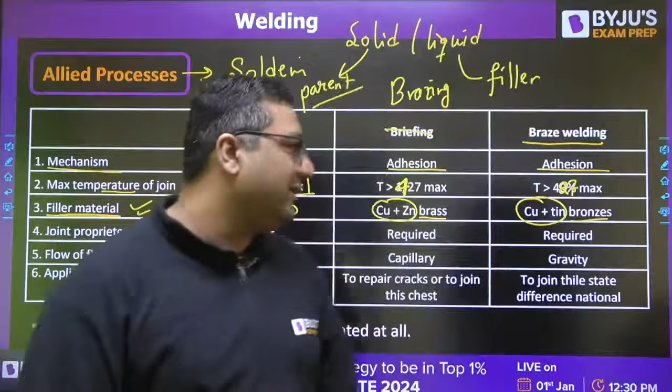Generally, braze welding uses gravity force for the filling of molten metal. On the other hand, soldering and brazing use capillary action for filling the gap. That is the major difference. For capillary action, the gap between the parts should be very, very small; only then will capillary action happen.

Hi sir, I have to revise machine design. Yes Dhruv, the marathon would be sufficient because 8-hour marathons will give you a quick revision. The only problem is practice, so I have already planned for that too. On the same day as the marathon, I will also take a practice session. Tonight too, if you want, you can join me for the machine design practice session. I will teach everything from the very basics, and if you join it, it will be enough for at least 80% of the marks in the GATE exam. Shreyas, we are going to complete this within the next 20-25 minutes. As promised, it will be a 2.5 hour session.

Okay, let's move further. For the applications: for electrical and electronic circuits, we use soldering. For hydraulic circuits, we use brazing. And for braze welding, we are going to join the plates like welding only.

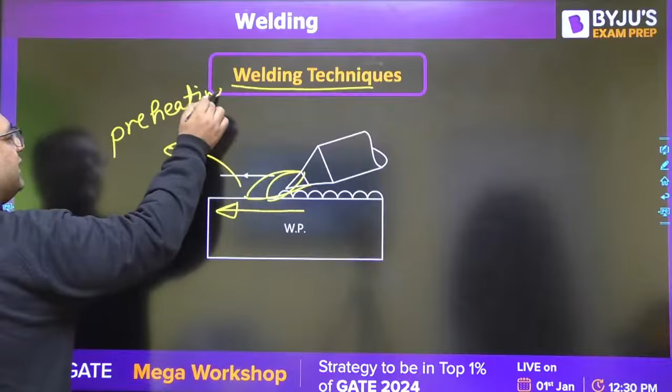When we talk about different welding techniques, the first is the forehand welding technique, where you move towards the non-welded part. Here, the outer flame reaches first and the inner flame reaches second. Because of that, the outer flame does preheating, which removes any oxide layer if present. Preheating increases the temperature to some extent so it doesn't directly jump to welding temperature, reducing cracking defects. There would be no hot cracks, only cold cracks might happen, and no oxide layers would be present. This forehand welding technique is used for horizontal and vertical types of welding.

When using the backhand technique, the flame heads towards the welded part, whereas previously the flame headed towards the non-welded part. Here, the inner flame reaches first, then the outer flame reaches. So this time the outer flame does post-heating, which helps relieve thermal stresses after the welding process is completed. Once welding is over, we need to remove thermal stresses, and for that we use the outer flame, while the inner flame is used for the welding purpose itself. For horizontal and overhead joints, we use this backhand technique.

The angle made by the torch axis with the horizontal is called the torch angle. This torch angle is 90 degrees at the start of welding and 0 degrees at the end of welding. During welding, it lies between 0 and 90 degrees, because in the starting we need more heat to be concentrated.

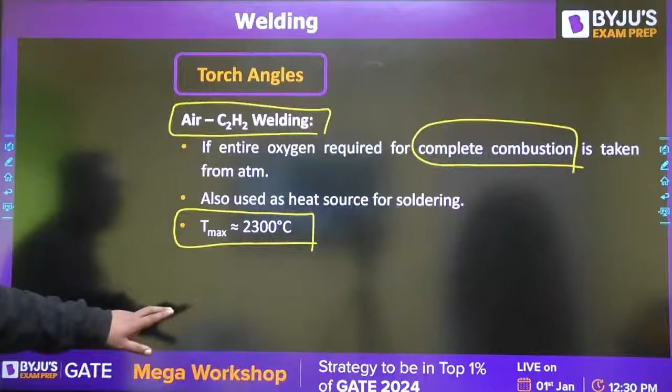If you are not providing oxygen from the cylinder, then the entire oxygen required for welding would be taken from the outside air. Such processes are known as air acetylene welding. In such a case, the flame length increases and temperature gets reduced, because for complete combustion, entire oxygen is taken from outside air. That is why temperature is very low, and it is used as a heat source for the soldering process.

Now we are talking about radiation - radiant energy welding. Here we have electron beam welding first. As the name suggests, welding happens with a beam of electrons.

First of all you have a tungsten electrode, or some kind of electron gun, which is the cathode. Then we have a cup-shaped cathode. Then we have an annular anode, which has some hole in between.

So what happens is, as you provide the power source, electrons come out, and these electrons are repelled by the cathode and attracted towards the anode.

It is like in some ad, have you seen an ad where an actor and actress are there. The actor is standing with open arms, and the actress is coming towards him. And when the actress is coming towards him, at the same time the actor has to hold his pants, so the actress goes down. That kind of ad was once on television.

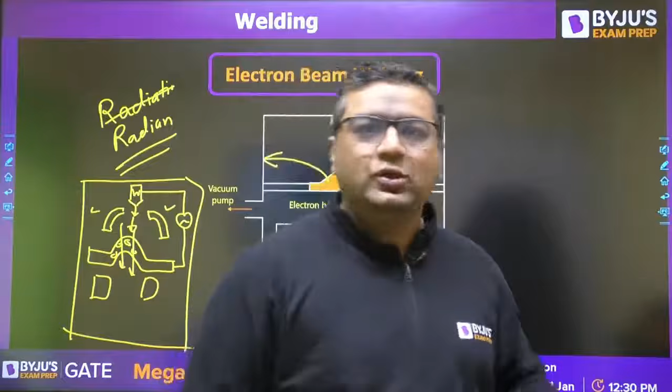When these electron layers are going from this anode, we have focusing lenses which help us focus these electrons at the welding region. Now, if these electrons collide with the workpiece surface, they give their kinetic energy which is used for welding. That is why we need to take care that these electrons shall not collide with oxygen, otherwise they will lose their energy and welding will not happen.

That is why we provide vacuum. And when these electrons collide over the metal surface, X-rays get generated, which are very harmful for human beings and can cause cancer. To avoid that, we need to make this setup lead-lined. Lead is going to absorb the X-rays. This is used for welding of super alloys.

The kind of weld produced here is very deep and thin. The width to depth ratio - this is depth, this is width - is generally 1:3. So whenever these welds are produced, their depth to width ratio is very high. Generally, deep penetrated welds are produced, with very good quality. So this is the EBW process.

The applications of this process include joining tungsten, titanium, nickel, cobalt, stainless steel, beryllium in aerospace applications.

Moving to thermit welding, the second type of chemical reaction welding. Is it also used in space? Dear, it is not used in space, but used for aerospace applications.

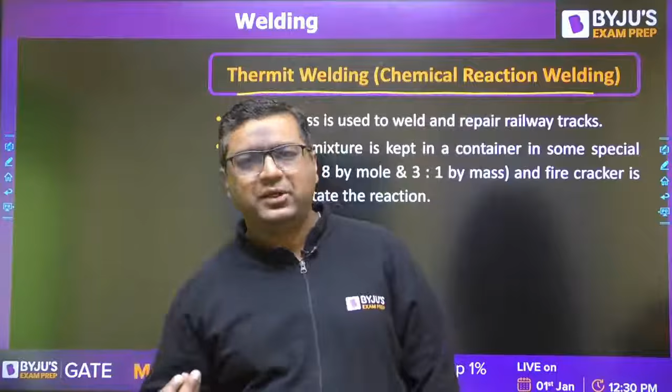For that, we just need some basic things which an engineer always has. One lighter, one pudia containing the thermite mixture, and containers which are generally available everywhere. So we take a container, put the thermite mixture in it, and we use a matchbox to start the reaction.

This thermite mixture contains aluminium and Fe3O4. If I see the ratio of Fe3O4 and aluminium, it is provided in 3:8 ratio. So we have this mixture, and when they react with each other...

Al plus Fe3O4, in ratio 3:8, gives you 9 iron plus Al2O3, which is 4. So this is what you get, and this is the molten steel.

This molten steel turns to boil, and this molten steel is heavier while the slag is lighter. So we remove this lighter layer of slag coming at the top, and the rest of the molten steel is poured inside the gap of the two rails, and the weld is produced. Is it clear?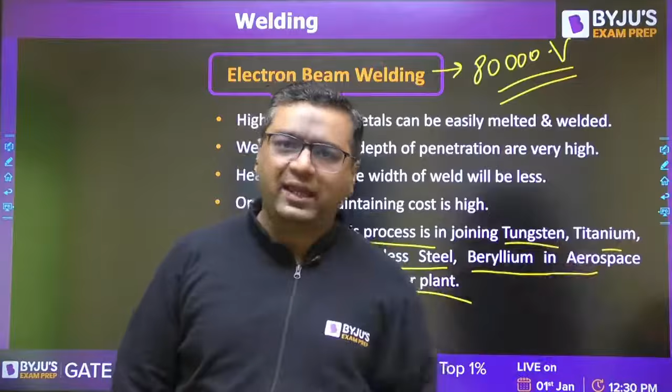No, Shri Arvind, actually in electron beam welding process, the speed of welding is more, that's why the heat affected zone is less, because a very large amount of heat comes quickly. In electron beam welding, we provide around 80,000 electron volt potential difference, and it is restricted up to 1.5 lakh for welding, going up to 2 lakh for cutting purposes. Because of this, it is a continuous process happening very fast, so speed is high and heat affected zone is lesser.

Okay, that I already told you in general, that's why I didn't mention that point. So in this process, we just need to pour that molten steel into the gap of the rails, and the weld will be produced. That is the beauty of the thermite welding process, the second type of chemical reaction welding. This is used to join railway tracks on site where we do not have availability of very large and heavy equipment.

Next is atomic hydrogen welding. This is a special welding process which is a combination of two, and does not come in any of the categories. In this we provide hydrogen gas along with electrodes. When hydrogen gas is provided with these electrodes, some arc is provided that breaks it into hydrogen positive and hydrogen negative ions. So the hydrogen gas is broken into ions.

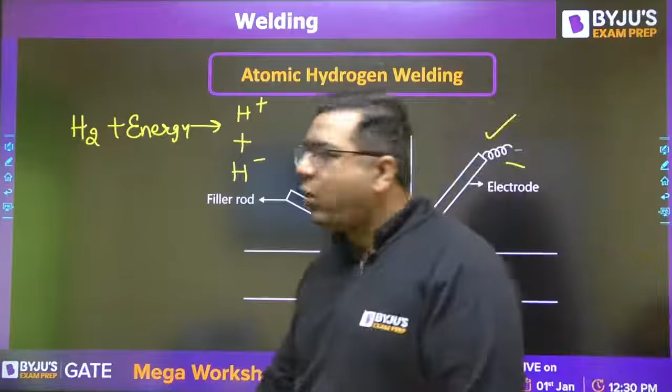Now, energy is provided by the spark. The hydrogen ions are unstable, so they react with each other again to form H2, and a large amount of energy is generated. This energy is used for the welding purpose. Now, some people may ask, as an interviewer I always ask this question: when this is happening, why don't we directly use this energy for welding, why are we using this other process? Some people say this energy is more than that.

Then I say, wonderful, why are you looking for any job? Just do this work at your home. Break hydrogen, join hydrogen, every time you will get some energy. This is against the energy conservation. How are you getting more energy? This is not fusion or fission happening.

In fusion you get extra energy, but there it is not fusion. Hydrogen is resulting into hydrogen only, so no fission, no fusion is going to happen here. In fusion or fission we get some other element. So my dear, the reason for this is something different.

And the reason for that is there in heat transfer. When you study heat transfer, you must have seen a curve between conductivity and temperature, and there three lines were provided: this is for air, this is for hydrogen, this is for helium. Helium is costly, so we are not using it.

So if you see the hydrogen, you can feel the conductivity at some temperature is going to be more for hydrogen than that of air. So if we use hydrogen environment, more heat would be supplied to the welding and efficiency of the process will be high, because heat loss to the surrounding will reduce. That is the reason why we use this.

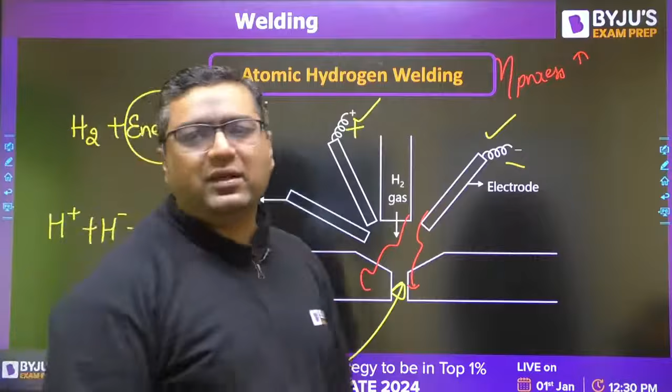Otherwise, you are going to say whatever the energy difference is wrong. Energy is not different; energy reaching to the surface is different. So I feel now you got it. The reason is that at welding temperatures, which are already higher, hydrogen is more conducting than air at high temperature. So that is how we are using it.

That's why I mentioned there is nothing like fusion happening here. Exothermic reaction is the process. This reaction is an exothermic reaction.

So moving further guys, now we are talking about welding defects. Spatter defect we have already discussed. Then, heat flow characteristics.

So when we have heat flow during the welding process, there are two types of heat flow formulas given: this is for 3 dimensions, this is for 2 dimensions. Heat flow happens during the welding process.

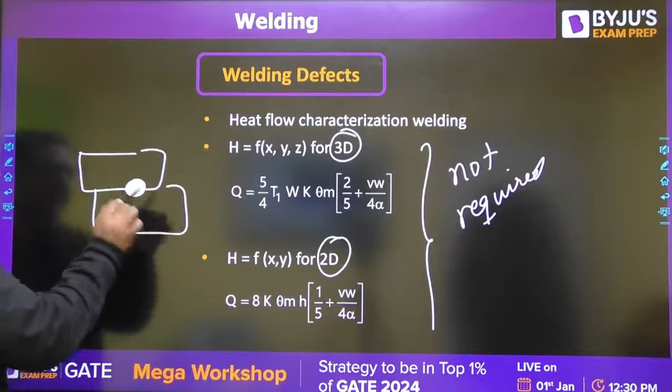So when we talk about this, whenever we have the spot weld, for the spot type of welding this is like a sphere, so we are assuming this would be acting like a heat source in 3 dimensions. So for spot welding we would use this formula for heat flow characteristics. But in case of butt weld, it is like a line, so that would be considered as 2-dimensional, where heat is going to flow in 2 dimensions. So for butt weld we will use this, and for lap joint or spot weld we will use this.

Here these parameters are explained: theta m is the temperature difference, VW is the weld velocity, alpha is the thermal diffusivity - all these things are mentioned. Q is the heat rate; rate of heat means watt will be the unit. H is height of bead, width of bead, conductivity, melting point, then welding speed, thermal diffusivity. So these are the parameters.

Now there is a term known as duty cycle, which is very, very important. While solving welding problems, I come across the designation standard of welding electrode. Actually that is in PI syllabus, not in mechanical, so we are referring to the mechanical syllabus only. PI syllabus has it, so that question will be in PI, you can check it - that is from the production industrial paper.

So when we are talking about duty cycle, as in electro-slag welding you also have seen that after some time we stopped the arc and welding was happening without any current.

Because of already presence of high temperature. So duty cycle is defined in such a way that the time for which you are continuously switching on the arc, it is also defined as arc time by weld time.

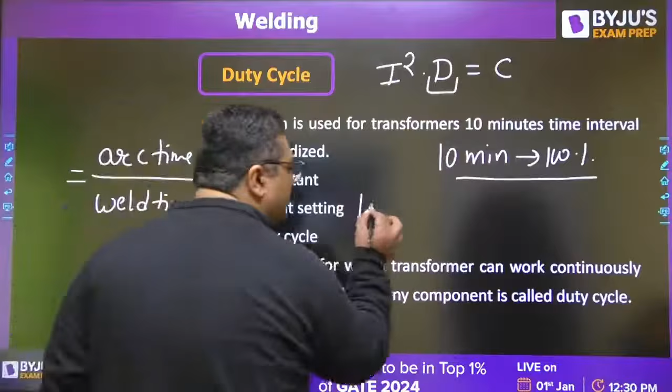The question will be like: for 1000 ampere current, duty cycle is 40%. Then for 600 ampere current, what would be the duty cycle? So what would you do? You would say 1000 square into 40 equals 600 square into what? Whatever you get here would be the value of duty cycle D2. This type of question can come in the exam.

So my dear, next defect is arc blow. What is going to happen if you are going to weld this plate? During the welding, current is flowing. Because of current, magnetic field is generated across the electrode and workpiece. So whenever you start the weld, there are chances of deflection or deviation of the arc because of this magnetic field.

Because of this deviation, we can have a defect like scattering of molten metal. If you want to avoid that kind of defect, we provide some extra plates so that this deviation should not happen, which is called tab in and tab out. The chances of arc blow are more with DC, less with AC.

Okay, so you guys have studied duty cycle and arc blow. So my dear, now we are moving to laser beam welding.

In laser beam welding, the principle is: if we have atoms at low energy, when energy is provided with the xenon lamp, these low energy atoms go to high energy. It doesn't mean the atoms physically move like that, I mean their energy increases. So when energy is more, everybody wants to be at a lower energy state because there they face more stability.

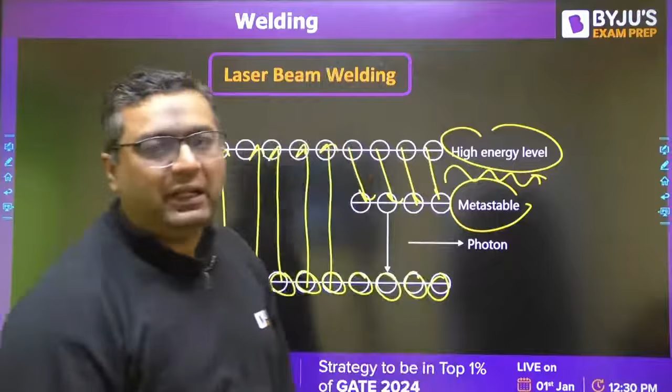So my dear, how is it happening? This is the xenon lamp. Here we have the pumping zone, where we are providing some power. Because of the amount of heat coming from the xenon lamp, it goes to the high energy region and releases some kind of photon.

When that energy light comes, this surface is 100% reflective, which will fully reflect the light. This other surface is 98% reflective, which allows 2% to come out straight. When it comes out straight, it collides with the mirror, which directs it towards the lens, which converges it onto the welding area.

So in laser beam welding, we need not go for any kind of vacuum pump, so the cost is less. Here no X-rays are produced, so it is lesser harmful. It is more preferred over electron beam welding and can be used for all those applications of electron beam welding we have seen.

So my dear, this is something known as laser beam welding. For this, you use two types of laser. One is ND-YAG, where ND represents neodymium, Y for yttrium, A for aluminium, G for garnet.

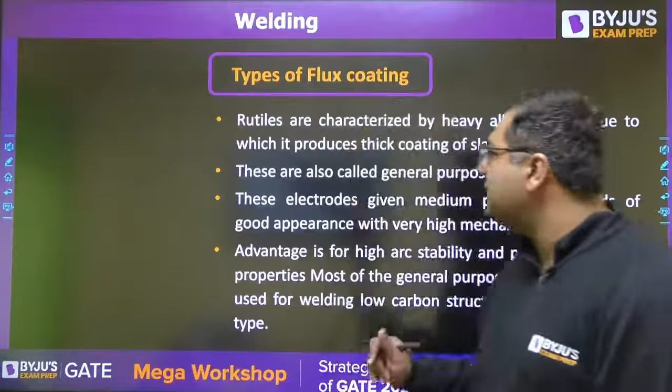There are some theories which I am not covering here because that's something you need to remember and I can't help with that, like the types of flux coatings. Flux coatings have elements that help provide the weld bead, some elements that raise their melting point temperature, some elements that help with arc stabilization and increase melting point temperature, and some elements that make them lighter. So those elements are mentioned. There are types of flux coating like acidic, basic, rutile - all mentioned here. You need to remember the elements in those coatings. For example, in acidic coating we have Fe3O4, MnO2, quartz, silicates. That I cannot help with - you need to remember that only. That's why I'm providing you these slides, but you need to remember them.

Yes, that's why I was asking you. My Sunday, I can dedicate it for you. But the point is whether you can dedicate your Sunday for that or not.

Okay fine guys, so I am just quickly going through the casting defects. Otherwise that is also something you can mug up kind of thing.

In gas defects, first we have defects like blowholes and open blows. Sometimes moisture is present when the casting is happening, so because of that we get holes inside, like you can see here. Why do they come? Some gases are produced at the time of casting when molten metal comes in contact with the facing sand and mould wash. Those gases remain inside if the porosity of the mould is not good. So inside there were gaps, bubbles present, and because of those bubbles molten metal doesn't reach there, so blowholes are present. If these bubbles are inside, we call it blowholes. If they come on the surface, we call it open blows.

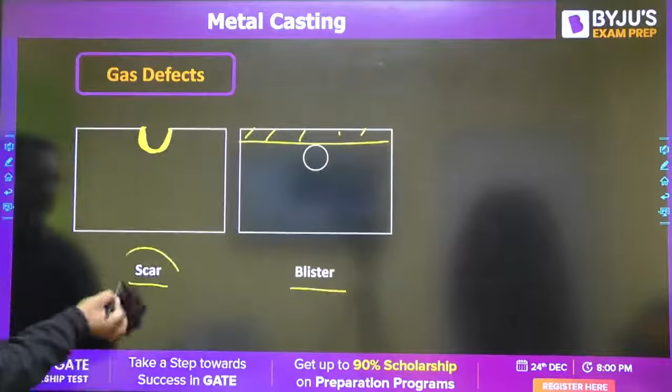Then we have scar. When talking about scar, if on the surface you have a very big bubble - in blowholes it was smaller - this kind of thing comes. This happens when the size is bigger, and in blister, one layer is covering it. When the layer is covering it, it's called blister; when the layer is not covering it, it's called scar. And if some hydrogen gas is present, you'll have very small holes inside the casting, called porosity or pinholes. We want porosity in the mould but not in the casting. So the reason is that gas defects forming inside the casting are blowholes, and on the surface are open blows. Scar is the shallow blow formed on the surface because of presence of a bubble on the surface, while blister forms inside. Small size holes created by hydrogen gas are called pinholes.

Next are remedies - you have to make good porosity of the mould so that gases can go out. The second type of defect is called moulding defect.

If your mould is not having good properties, let's say this is your mould, but at some place the sand is not having good strength and some particles of sand fall down from here and reach the lower surface like this. So your casting will also solidify in this shape now. This is called drop, because sand is getting dropped from here, and this is called dirt, because here you will not be having the metal. So this is the kind of casting defect you will get, coming because of the mould defect.

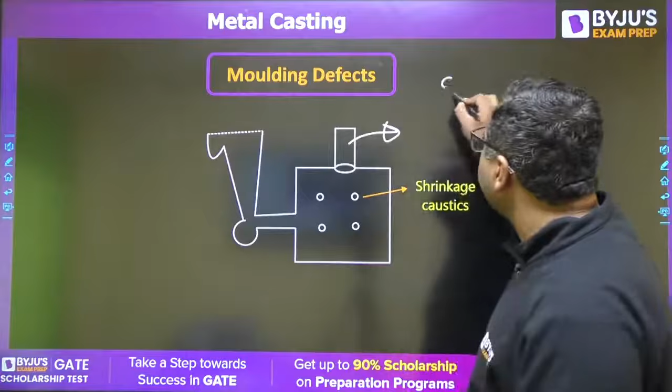So we have seen the molding defects completely. Now, the riser was performing some functions, and there were two types of solidification - one was skin forming, and the other was dendritic growth. In dendritic growth, there was a possibility of needing multiple risers because shrinkages occur at many places, and you cannot provide risers everywhere. So this defect is called shrinkage cavity.

Sir, okay. Thanks for that.

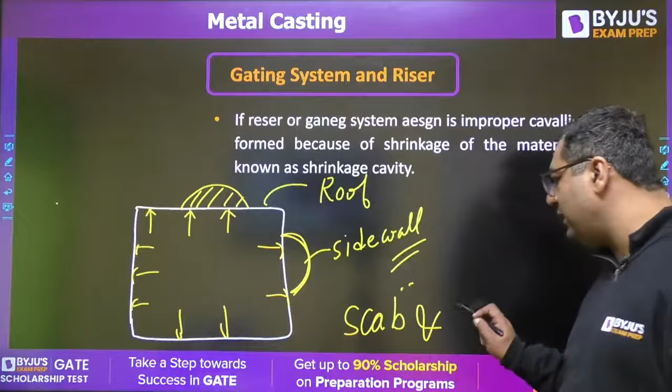Because of these hydrostatic forces, sometimes the mold gets a kind of shift, and the molding sand shifts by some amount. Because of that, molten metal enters and an extra part comes on the roof. Similarly, this can happen on the side wall also. This shifting of mold due to hydrostatic forces causes defects called scab and swell. They happen because of shifting of sand under the hydrostatic forces of molten metal. Here shifting is happening, whereas in drop and dirt, the molding sand was eroded and came down - that is the difference.

Then there are fluidity defects. Sometimes the molten metal has improper fluidity and is unable to fill the cavity completely. If you have a cavity like this and it's only able to fill up to a certain point, this defect is called misrun. And if two molten metal streams are coming, one reaching here and the other reaching there, leaving a gap in between, that is called cold shut. Both occur because of improper fluidity.